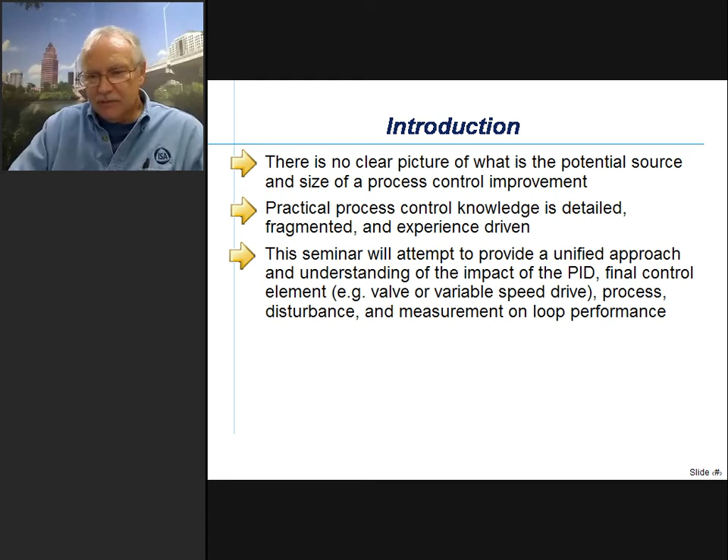So to give you some background, the way I see it, there's no clear picture of what is the potential source and size of process control improvement on a general basis. Practical process control knowledge is detailed, fragmented, and experience-driven. This seminar will attempt to provide a unified approach and understanding of the impact of the PID, the final control element, valve or variable speed drive, the process disturbance, and the measurement on loop performance. And we're going to do this in less than an hour.

Unifying concepts: it's all about management of change, whether intentional change in terms of setpoints that occur during startup or batch operation, during transitions, during optimization, or unintentional change as a result of disturbances coming in from other parts of the process. It could be ambient condition related, raw material related, due to valves acting badly, or control loops tuned too aggressively, or due to some interactions in general.

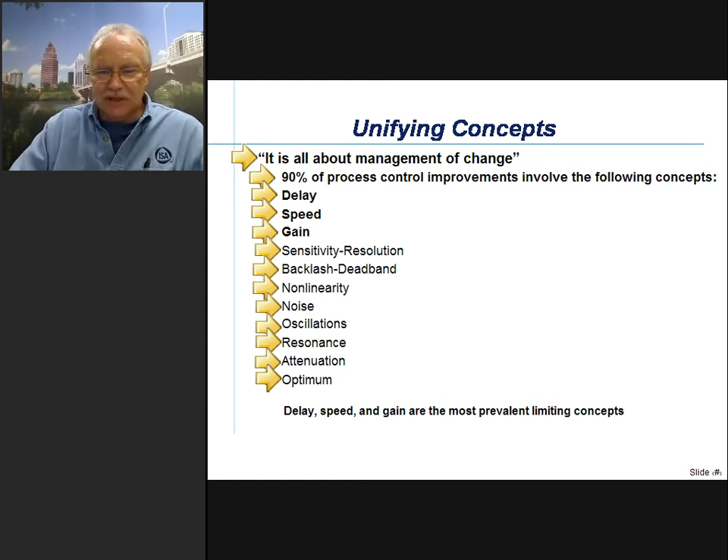90% of process control improvements involve the following concepts. Delay, speed, and gain are the big three, and we're going to spend most of the time today on those. Then hopefully we get into things that are becoming less of an issue, although some plants still have sensitivity, resolution, backlash, and deadband problems, principally with their final control elements, valves and variable speed drives. And there's the nonlinearity that's always there. We have noise, and we have oscillations, principally as a result of control loops and bad valves, and we can have resonance as a result of those oscillations. We like to have control systems and volumes designed to attenuate those oscillations. And lastly, there's of course the opportunity for optimization, and to realize a lot of the benefits from making these improvements, you often have to change your set point. So delay, speed, and gain are the most prevalent limiting concepts — we'll spend the most time on those.

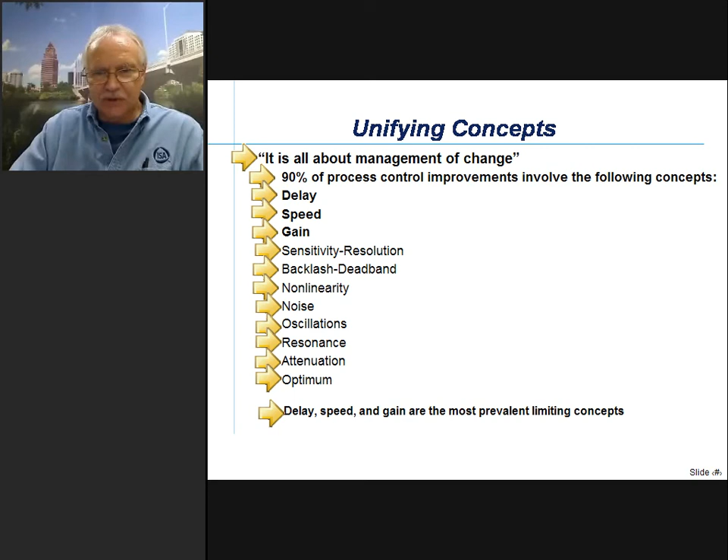Delay: without dead time, I'd be out of a job. I said that a long time ago, and since I still have a job, we still have dead time in all our loops. The only place where you don't have dead time, or negligible dead time, might be in aerospace or servo mechanism control, or sometimes in loops created in a university, theoretically anyway, ending up with just a single time constant and no dead time — you can do principally anything you want with those loops. But in real life we have dead time, and a more descriptive name would be total loop dead time. The loop dead time is the amount of time for the start of a change to completely circle the control loop and end up at the point of origin.

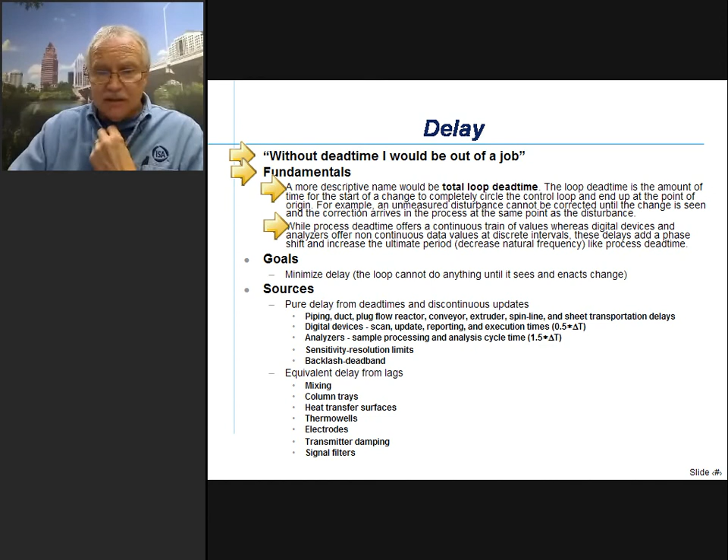An unmeasured disturbance cannot be corrected until the change is seen by the controller, and the correction arrives in the process at the same point of entry as the disturbance. Process dead time offers a continuous train of values, whereas digital devices and analyzers offer non-continuous data at discrete intervals. All of these delays add a phase lag, increase the ultimate period, and decrease the natural frequency, like the process dead time.

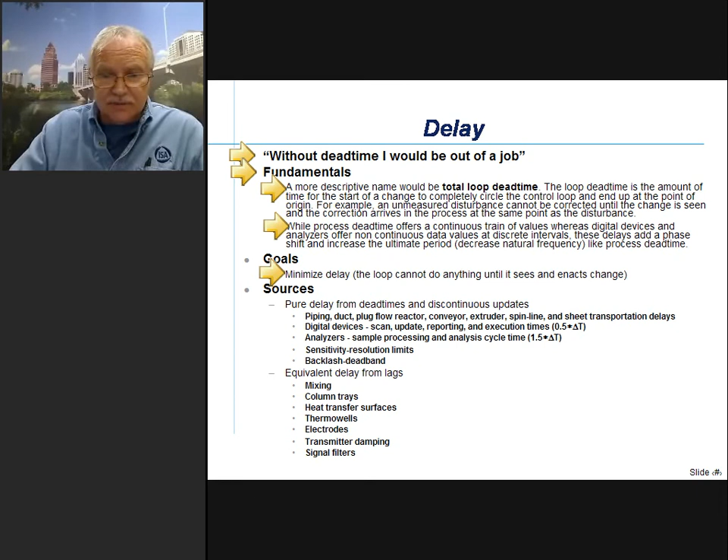Our goal is to minimize delay, wherever it is. The loop cannot do anything until it sees and enacts a change. We have pure delay from dead times and discontinuous updates.

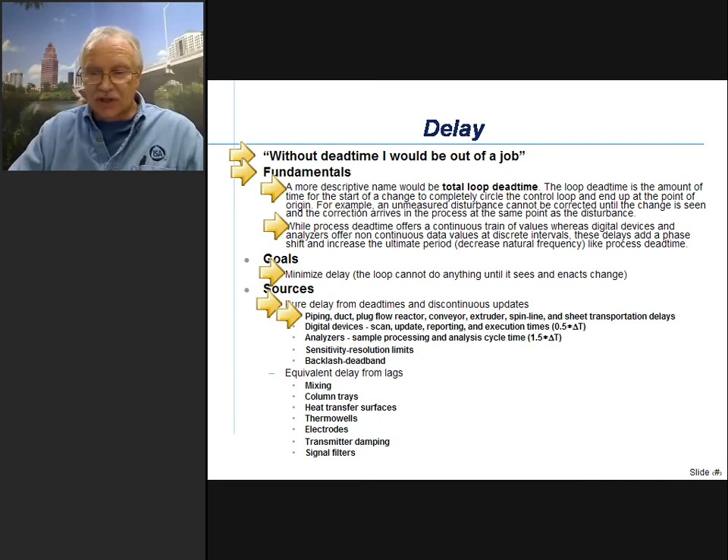In the process, piping, ducts, plug flow reactors, conveyors, extruders, spin lines, and sheets can all have transportation delays, where a change at point A takes time to be transported to point B, perhaps where it is measured. This transportation delay, for a lot of this type of equipment like piping, ducts, and plug flow reactors, could simply be the volume between point A and point B divided by the flow rate.

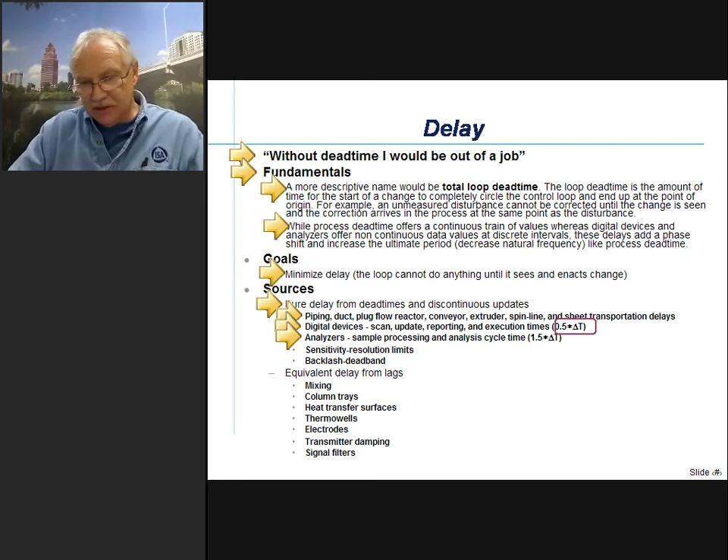We also have digital devices today, and hopefully the scan, update, reporting, and execution time is small compared to the process dead time. On average, the amount of delay from these scan, update, reporting, and execution times can be considered about half of that time interval. Then we have analyzers, which can be a source of much larger dead time when there's sample processing and analysis cycle times. Since the result is made available at the end of the cycle time, whereas with digital devices it's usually near the beginning, we actually get more effective delay. You really need to take 1.5 times the total sample processing and analysis cycle time as the amount of delay you'd get in the control loop.

Then we have sensitivity and resolution limits. People often don't realize these create dead times, because a lot of discussion in the literature uses step changes for testing. If you make a step change large enough, you won't see the dead time from sensitivity and resolution limits, or from backlash and deadband. But controller outputs usually are ramping rather than stepping, and the ramp through these limits takes time. You can estimate the dead time as the value of the sensitivity and resolution, or backlash and deadband, divided by the rate of change of the controller output. So the faster you tune your controller, the less you'll see in terms of delay from sensitivity and resolution, backlash and deadband.

Then we have the equivalent of delay from small time constants, small lags in series. In the process, this is due to mixing—we don't have perfect mixing, so we get lags associated with that. The big source of large lags is, of course, a distillation column or any type of column with many trays, where each tray is like a relatively well-mixed volume due to turbulence and bubbles. All these volumes in series create lags, and as a result, these lags in series create dead time or delay in the process.

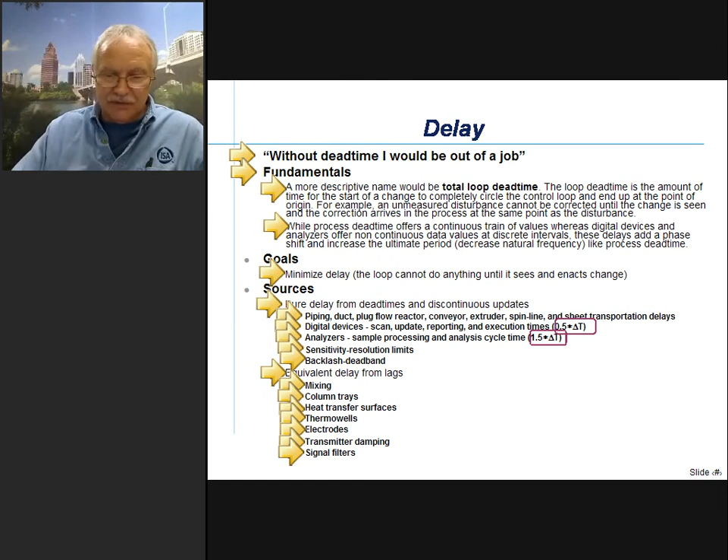And we do have an equation later on to show how you can figure out what the real process is doing if somebody put in a big signal filter. Or you can use the same equation to see the effect of volumes that act like a filter of oscillations.

Anyway, the other parameter that is very important is speed. I first started to think of time constant, time lag, but then you got integrating processes, and all different sizes of time constants, and really what we're looking at is the rate of change of the process, principally in the first 4 dead time intervals, in the beginning, when the controller has to do most of what it can do. The thing is that speed kills. High-speed processes and disturbances, or low-speed control systems, can kill performance. So the fundamental here is the rate of change in 4 dead time intervals is most important.

And we'll see this for the 3 major types of processes. By the end of 4 dead times, the control loop should have completed most of its correction. Thus, the shortcut tuning method in Deminar 6 is consistent with performance objectives and this fact that the rate of change initially, right after you start to see the response, is what's most critical.

Our goals are to make the control system faster and make the processes and disturbances slower. I remember taking a graduate course in distillation column control and I was told by the professor, this process is really bad because it is so slow. And I'm thinking, wow, slow process, I can tune my controller to take advantage of the large process time constant. It turns out for distillation columns, a large process time constant is about 5 times larger than the dead time. And if you tune the controller to be aggressive, it means you can catch up to these disturbances a lot better, since the column is responding slowly.

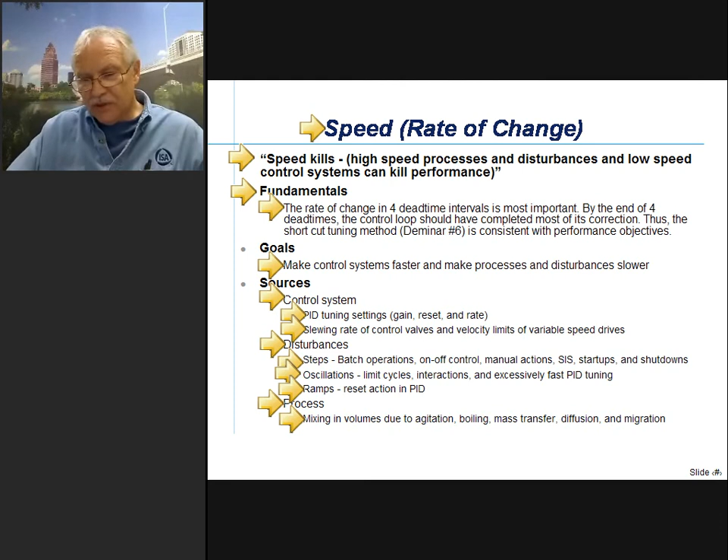The mixing is provided by agitation, boiling, mass transfer, diffusion, and migration. So even if it's not an agitated tank, if you have a large enough tank and a big enough residence time, just due to diffusion and migration and the tendency of chemicals to go from areas of high concentration to low concentration, we'll end up with mixing and blending, unless there is some layering going on due to density changes between components in the tank.

The third concept is gain. It's everywhere in the loop. All is lost if nothing is gained. If you had a zero gain, you wouldn't be able to see what's going on. So a zero gain anywhere in the loop would be, of course, disastrous.

We don't see that, but we do end up sometimes with control valves being on the very flat part of their installed characteristics, and we say they're losing their sensitivity. Really what they're doing is ending up with almost a zero gain for that final control element when it's way out on the flat part of the installed characteristic. This occurred quite a bit when we were trying to push plants way beyond the normal operating set points they were designed for, and we end up with valves on the flat part of their installed characteristics, say rotary valves up around 80 to 90% open.

Fundamentals. Gain is the change in output for a change in input to any part of the control system. Thus, there is a gain for a PID controller. We're probably familiar with that, but also with the valve, disturbance, process, and measurement.

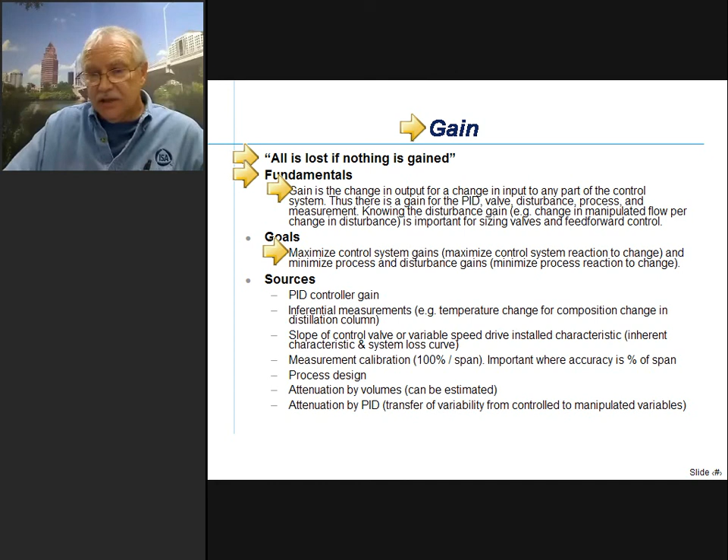Knowing the disturbance gain, the change in manipulated flow per change in disturbance, is important for sizing valves, for feed-forward control, and for control system analysis. Our goals are to maximize the control system gains, maximize the control system reaction to change, and to minimize the process and disturbance gains, minimizing the process reaction to change.

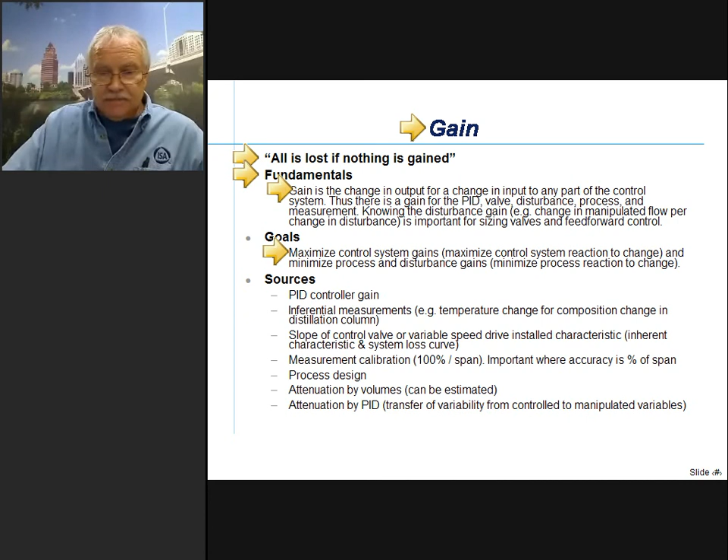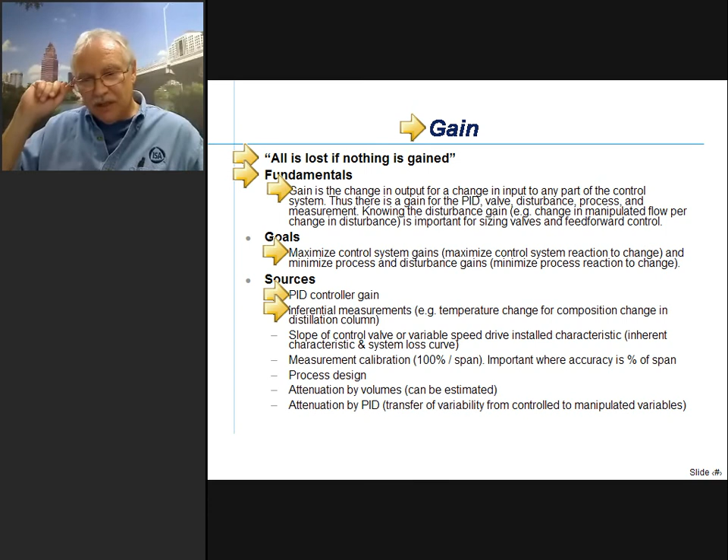The sources: PID controller gain, inferential measurements, the temperature change for a composition change in a distillation column. This is one case where the gain needs to be increased because it's an inferential measurement, and if you don't have much of a temperature change for a composition change, then you're not going to be able to use temperature in the control loop as a way of controlling the composition of the column.

So it is a case where, in inferential measurements, you've got to make sure that whatever you're using as an indication of what you're really after, which is often a composition, has enough of a change for the composition change to be indicative of what's going on.

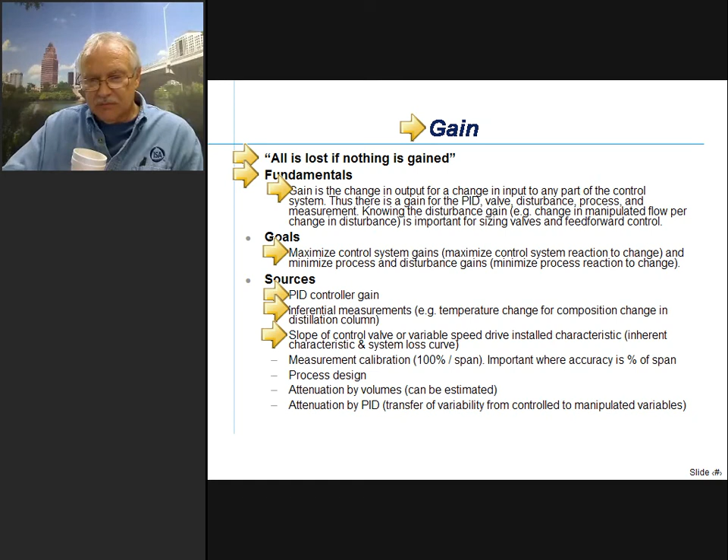The slope of the control valve or the variable speed drive installed characteristic, that's going to be the gain, and it depends upon the inherent characteristic and the system loss curve. You have to be particularly careful with variable speed drives with high static heads. You may run out of process gain there at the low speeds much sooner than you might think.

Measurement calibration: the gain there is 100% divided by the span. It's important where accuracy is in percent of span. With smart instruments, it's not so much the case, but in general, if you want to have a lower measurement error, you try and narrow the span to just cover your operating range of interest.

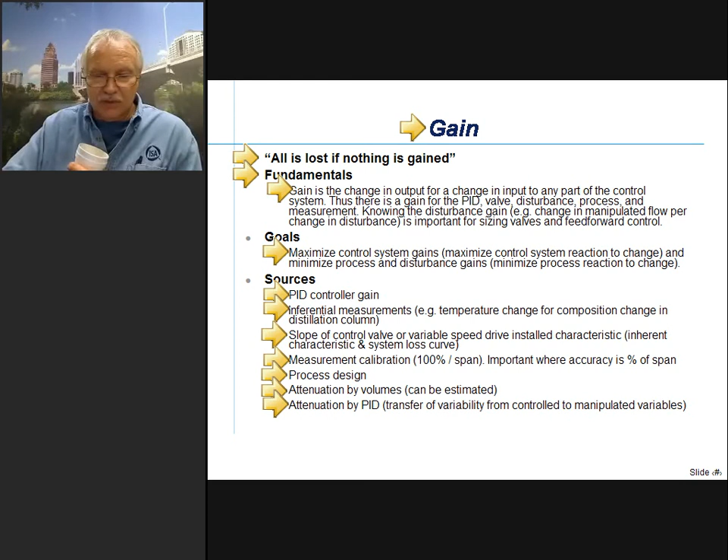And of course, process design is going to affect the process gain, and that's beyond the scope today. Attenuation by volumes, which we're going to see how to estimate, is going to actually reduce the gain of whatever is downstream that you're interested in. The attenuation by PID and the transfer of variability from controlled to manipulated variables is going to, again, attenuate and change the gain associated with what may be happening downstream that you're ultimately interested in.

Now, hopefully today, sensitivity and resolution is not so much an issue. With the new DCS systems, we have much greater A to D resolution, and with new smart measurements, we have better sensitivity, and with digital positioners and the newer throttling valves with diaphragm actuators, we have good sensitivity.

However, a resolution limit is different, and a resolution limit will quantize the change. It's very common in the literature for people to say resolution when really they should be saying sensitivity. It's nice to know the distinction, because actually a resolution limit would be more severe, because you're going to get a step response, and you're not going to get those intermediate values once you get past the resolution limit like you get once you get past the sensitivity limit.

Both will cause a limit cycle if there's an integrator anywhere in the process or the control system, a single integrator.

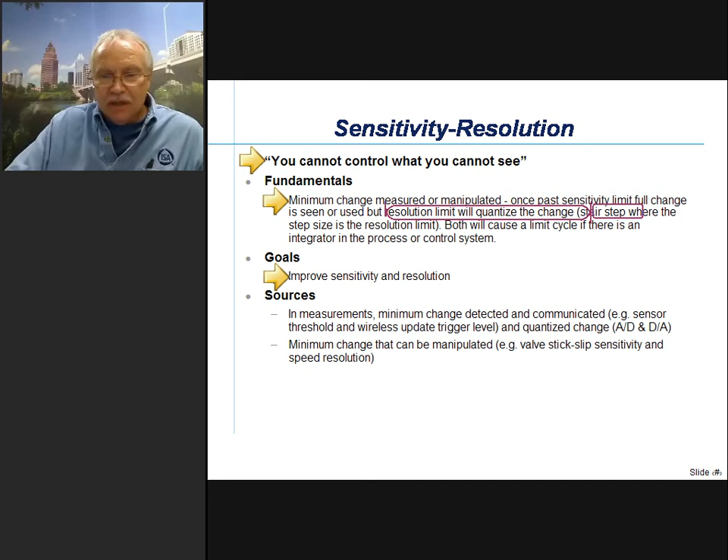The goals: improve sensitivity and resolution in measurements, meaning the minimum change detected and communicated. For example, the sensor threshold for its ability to do its job, and the wireless update trigger level, and the quantized change you get from A to D and D to A converters.

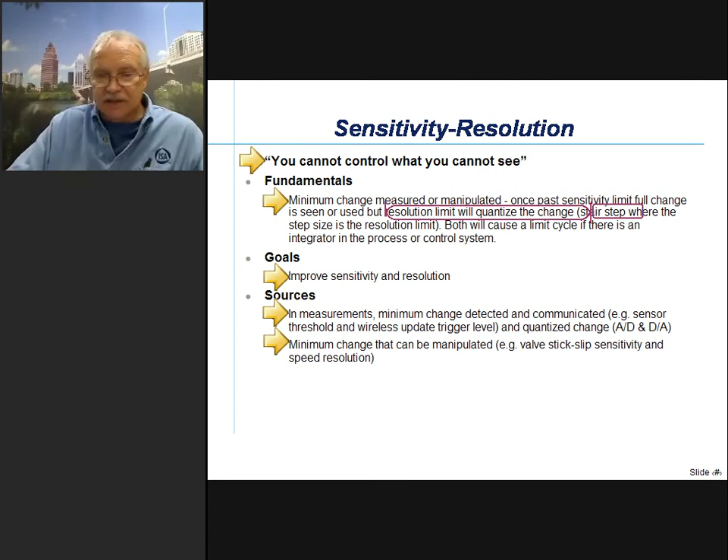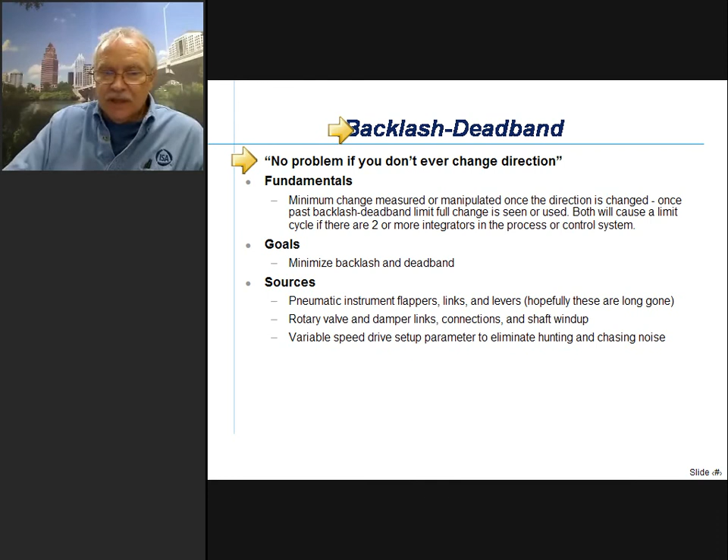For final control elements, it's the minimum change that can be manipulated. For example, control valve stick-slip sensitivity and speed resolution, backlash and deadband. It's no problem if you never change direction, but the minimum change measured and manipulated matters once direction is changed. Once past the backlash deadband limit, the full change is seen or used.

Both will cause a limit cycle if there are two or more integrators in the process or control system. It's not commonly known, but a cascade control system on a self-regulating process will have a limit cycle from backlash deadband if both the primary and secondary loops have integral action. So we should minimize backlash and deadband.

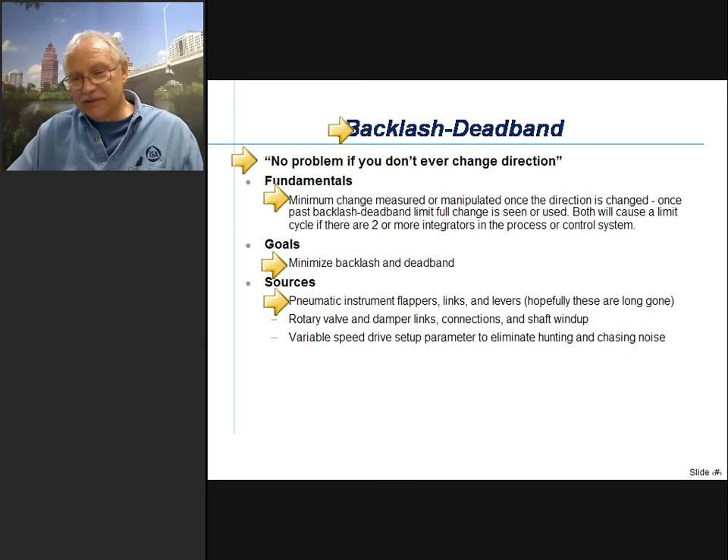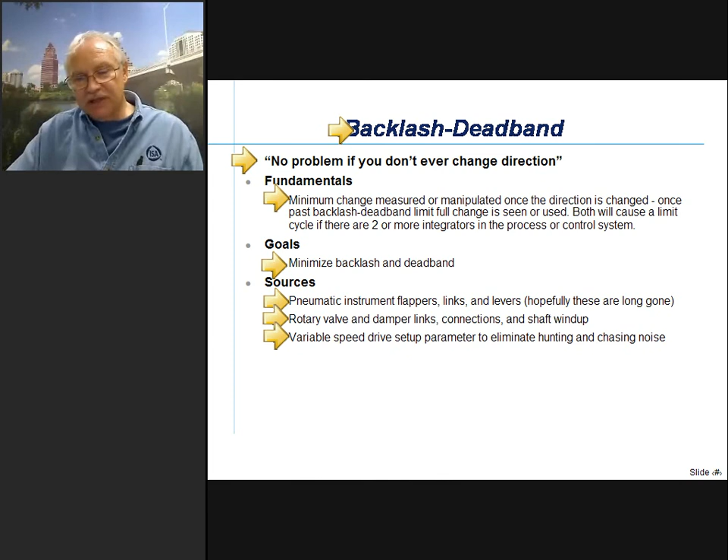Sources: hopefully we don't have any more pneumatic instruments laying around, installed. They may be laying around, hopefully not installed in your process, because the flappers, links, and levers have backlash and deadband. Rotary valves and dampers are notorious for backlash and deadband due to their links, connections, and shaft windup. Variable speed drive setup parameters often put in a deadband to eliminate hunting and chasing noise.

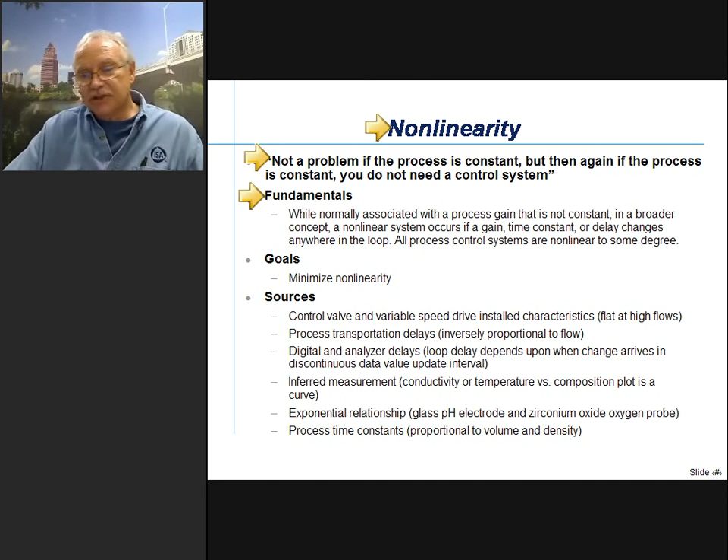Nonlinearity is not a problem if the process is constant, but then again, if the process is constant, you don't really need much of a control system. Fundamentally, while normally associated with a process gain that is not constant, in a broader sense, a nonlinear system occurs if a gain, time constant, or delay changes anywhere in the loop. All process control systems are nonlinear to some degree. Our goal is to minimize nonlinearity.

Sources are the control valve and variable speed drive installed characteristic, particularly with valves that have a flat characteristic at high flows. For variable speed drives, it could be at high static heads and low speeds.

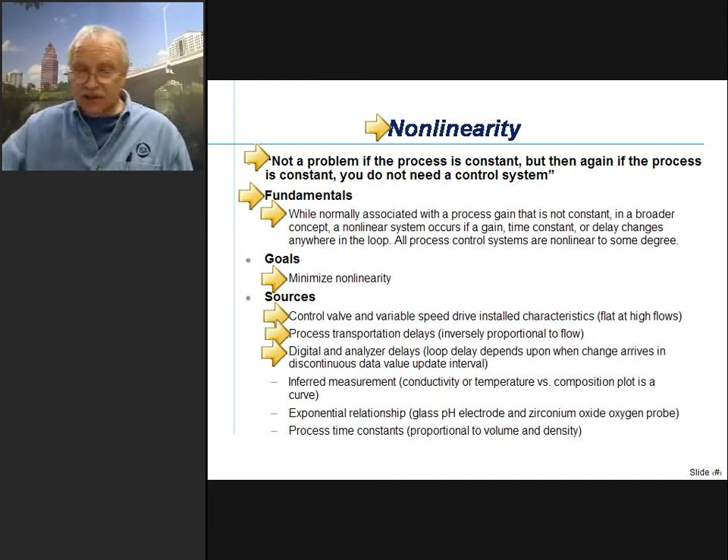Process transportation delays are inversely proportional to flow. Digital and analyzer delays, where the loop delay depends upon when the change arrived in a discontinuous data value update interval. But we have ways of approximating it on average, as I mentioned, as either half or 1.5 times the time interval, depending whether you're talking about a digital system or an analyzer.

Inferred measurements: a conductivity or temperature versus composition plot is a curve, but not a straight line. Exponential relationships, for example, the glass pH electrode and zirconium oxide oxygen probe. And process time constants that are proportional to volume and density.

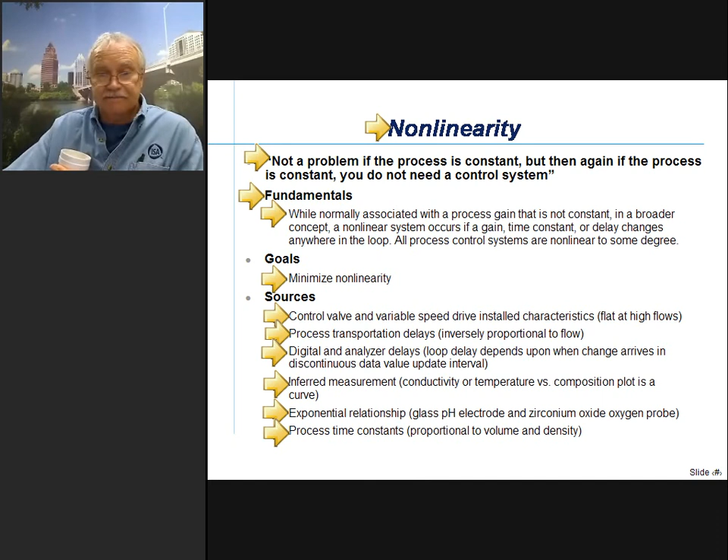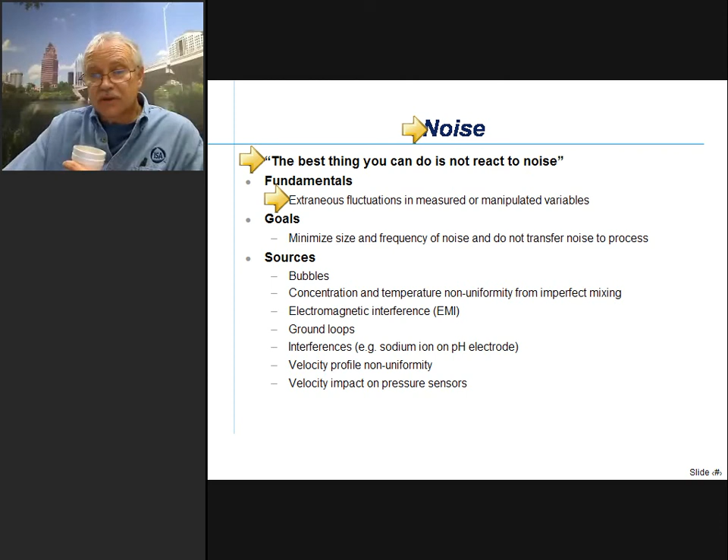Noise: the best thing you can do is not react to noise. Fundamentally, extraneous fluctuations in measurements or manipulated variables can be the source of noise. We want to minimize the size and frequency of the noise and not transfer noise to the process.

I think what I meant to say here in terms of frequency of the noise, well, it kind of depends where you are in terms of the control loop, which we'll see.

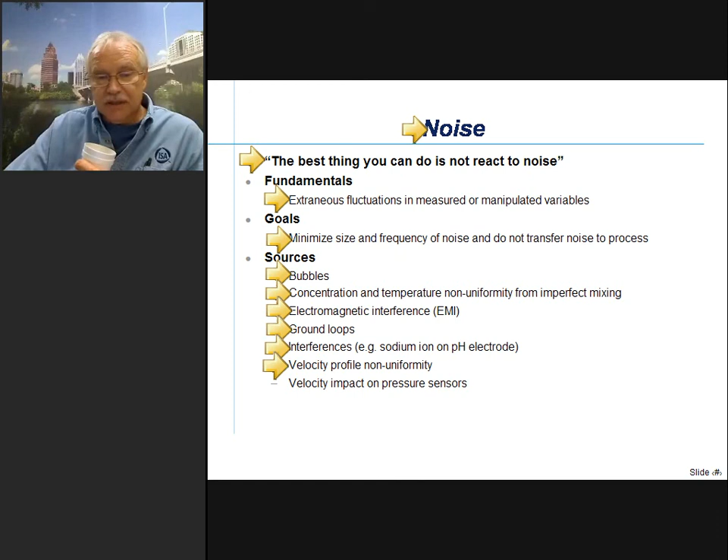Sources are bubbles, concentration and temperature non-uniformity from imperfect mixing, electromagnetic interference, ground loops, a common problem with pH, interferences such as with sodium ions and pH electrodes, velocity profile non-uniformity for a lot of flow measurements, and the velocity impact on pressure sensors.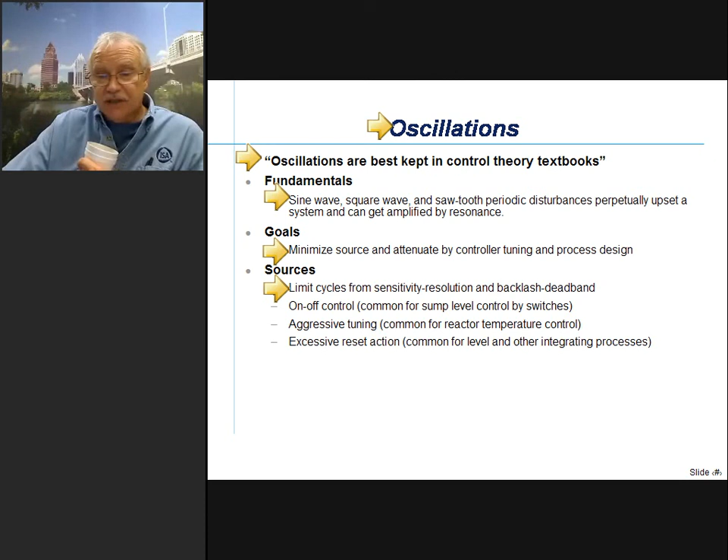Limit cycles from sensitivity, resolution, backlash, deadband, on-off control, aggressive tuning, and part of this is interactions, and then excessive reset actions that we get, particularly common for level loops.

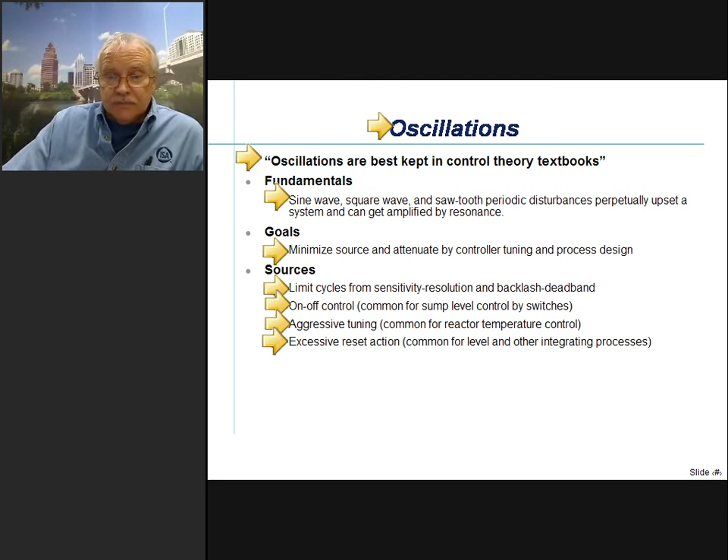Resonance: don't make things worse than they already are. The oscillation period, if it's close to the ultimate period, can be amplified by feedback control. Make the oscillation period slower, or make the control loop faster.

Control loops in series with similar dead times, like multiple stage pH control, are a situation that could end up in resonance.

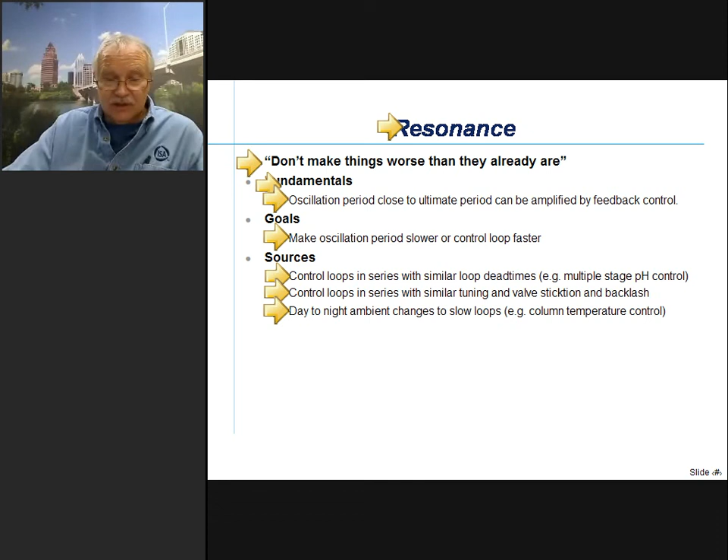And control loops in series with similar tuning and valve stiction and backlash, and a much slower oscillation, say from day to night ambient temperatures. But these can be a problem for slow loops, like on very big columns that may take a day or two to line out after a disturbance. Here, the day to night changes can end up causing continuous oscillation.

Attenuation. If you had a blend tank big enough, you would not need control. We ran into that in some spin lines.

We spent a couple of days there, but almost immediately we found out the polymer pumps were maxed out from all the different polymer lines. And I said, well, you have no control. I found out they had these huge blend tanks, and they were able to blend out the differences.

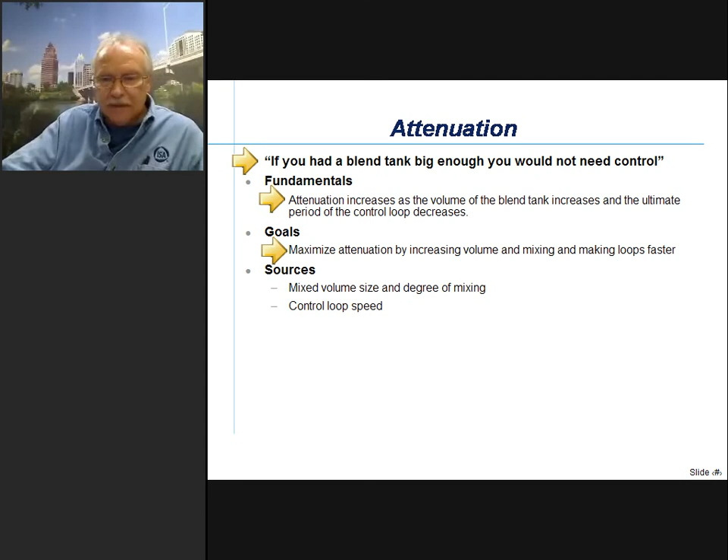After 10 minutes, they decided there was no opportunity, but we had to stay for 2 days to follow through. Anyway, attenuation increases as the volume of the blend tank increases and the ultimate period of the control loop decreases. We have an equation for that. We can maximize attenuation by increasing volume and mixing and making loops faster. So the sources of attenuation are the mixed volume size and degree of mixing, and also control loop speed.

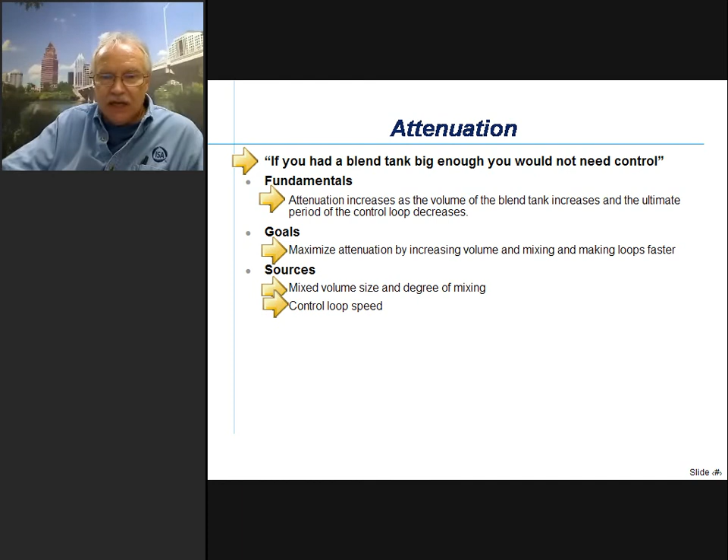Optimum. This is a whole subject in itself. Most set points are not at their optimum. The fundamental issue is the primary loop set point is offset from the optimum temperature, pressure, or concentration. We should minimize this offset.

The sources of non-optimum operation: the most common one cited is process variability, but we have other things like measurement error, sensitivity, resolution, backlash, deadband, and limit cycles. Lack of process knowledge is a big one.

Process nonlinearity means you can't feel comfortable with an adjustment being valid on a continuing basis. Operator preference - they have sweet spots, so that goes along with lack of process knowledge and process training. And then there are some incorrect safety instrumented system settings that cause you to back off from the optimum when you really don't need to.

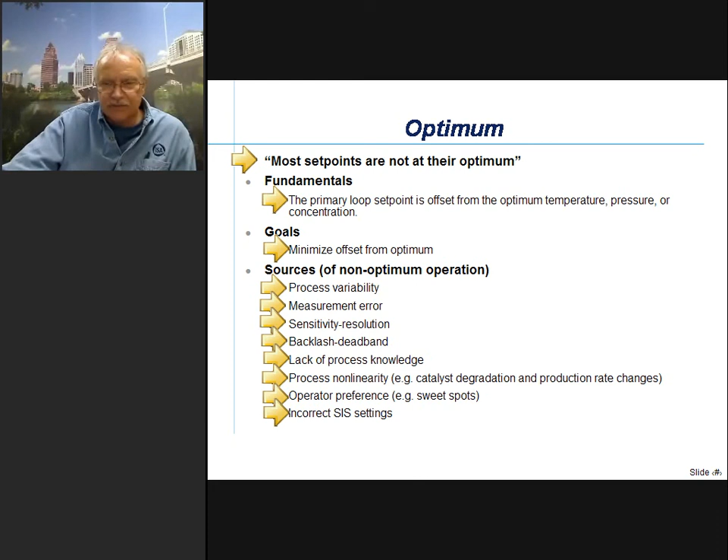So we have different types of processes. The three principal types are self-regulating, and here again I'd say it's the maximum speed in the first 4 dead time intervals, which is true for the more interesting loops. You could say for a flow loop everything happens so quickly that this isn't really applicable, but I'm more interested in the tuning of temperature loops, vessel pressure loops, concentration loops, and pH control loops. For those, we get much slower responses and larger process time constants.

So again, we do have a delay, and we do have a process time constant. In this case, it's a negative feedback time constant, and that determines the speed. We also have a process gain, and if you're going to use it for tuning the controller, you have to make sure everything is in percent per percent.

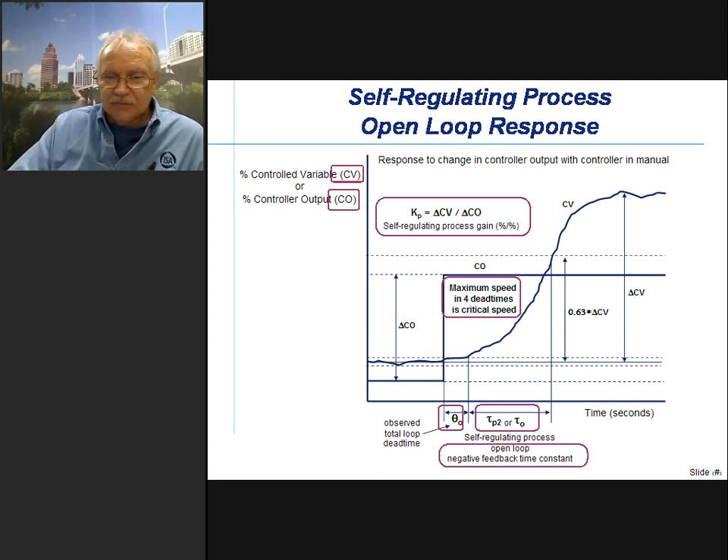So instead of PV, which is in engineering units, I like to use CV for controlled variable, with units in percent. Similarly, instead of controller output, which can be in engineering units, I like to use CO, to indicate I'm talking about percent controller output.

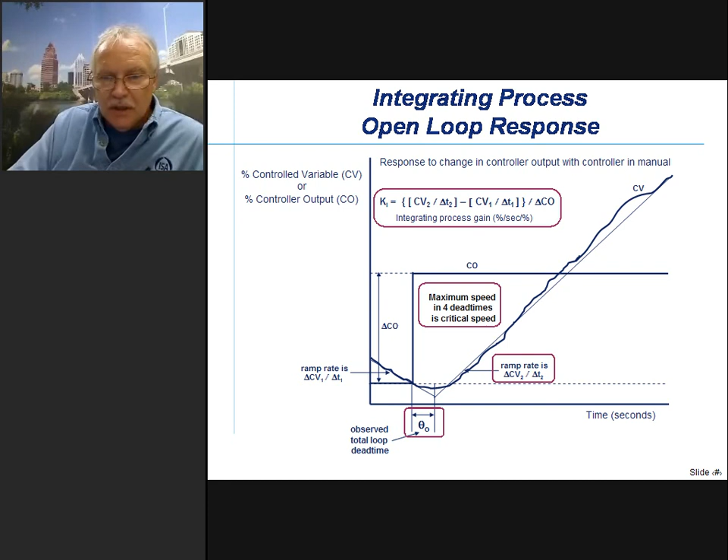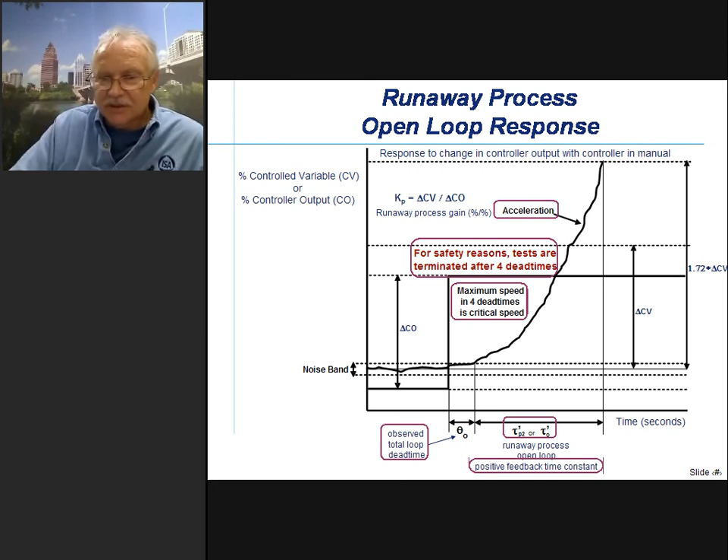Probably a safer way of doing this test is to do it in closed loop and make a set point change. These loops typically have high controller gains, so you're mostly going to see a step change in controller output from the high controller gain, and then a response in this ramp rate. You take the maximum speed there, and you can then kind of tune it with the shortcut method tuning settings, but you have to make some adjustments, as we'll see, for the reset time.

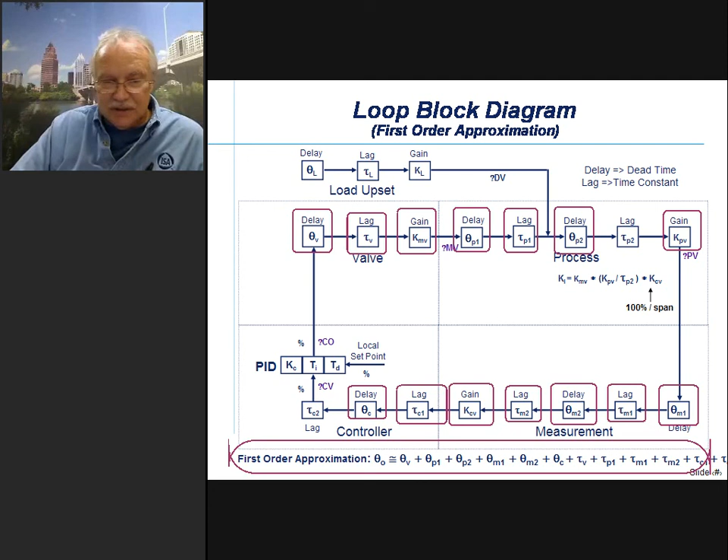But then we have lags here and delays here, and lags here, another delay here, and lags and delays. So if we sum up all of these, we end up with our first order approximation for the total dead time in the loop. Now, this is a nomenclature we're using.

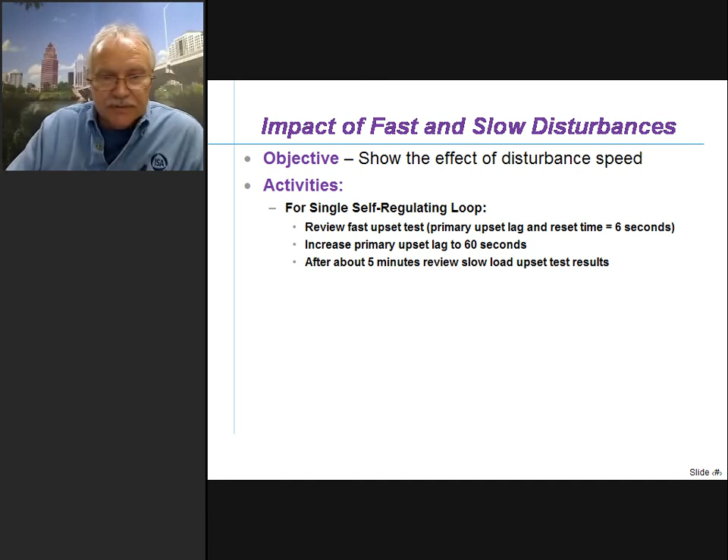So let's go and see the impact of fast and slow disturbance, and we're going to do that for a self-regulating loop. First, we're going to review the fast upset test, where primary upset lag and reset time are both set at 6 seconds. Then we're going to increase the primary upset lag to 60 seconds and see what happens.

We're going to do this in the single loop lab available on the process control website. We only have 2 virtual plants available because we're in the midst of making improvements, and it turns out with the remote desktop entry we have, IT departments typically only allow the ports we've got assigned for virtual plants 1 and 2.

We actually have 16 virtual plants, and we're working on a way of making these accessible without having to go through the ports blocked by IT. We're looking forward to making all the virtual plants available for free use by people.

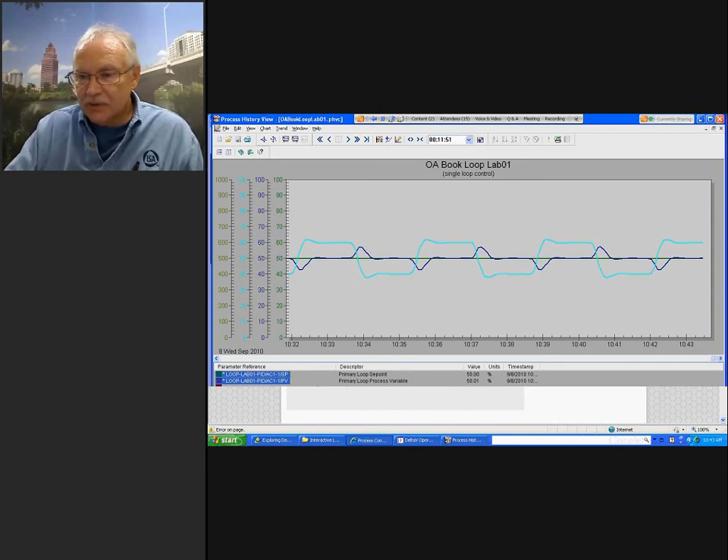Well, let's look at what we have in terms of an oscillation. I set up a test and simply do that. All I had to do here was go to the test mode. Normally we're in explore mode when we're looking at things, but here in test mode we have this square wave. However, the square wave disturbance has a time constant associated with it, and right now it is 6 seconds. So we're going to change that to 60 seconds.

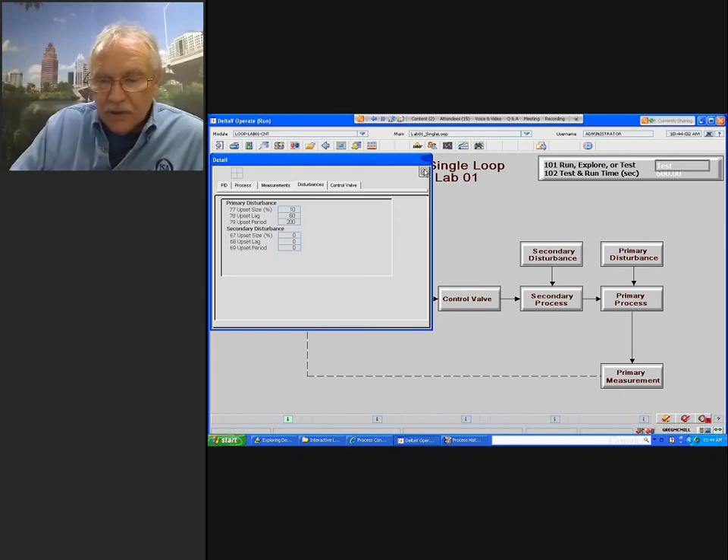And we're going to let that develop over a period of time, and while that's happening, we'll go back to the seminar.

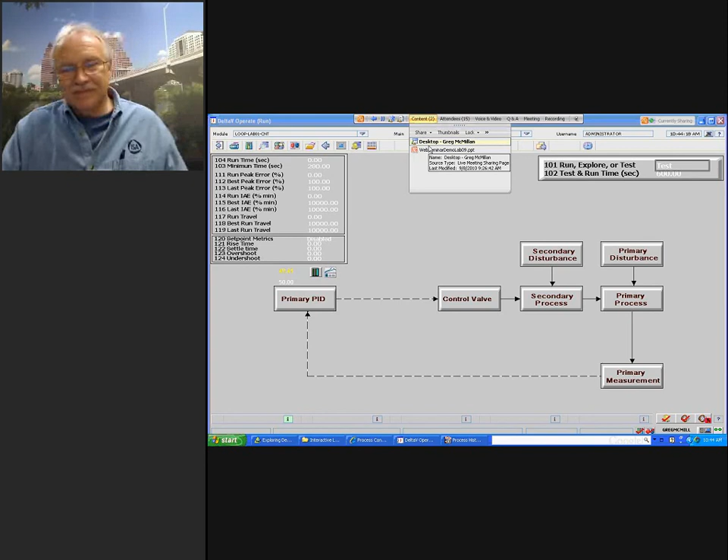Now, what people probably don't realize is that there is a practical limit to controller performance. I personally concentrate on minimizing dead time, but it turns out that if you don't concentrate on tuning the controllers as fast as necessary to meet your objective, you're going to end up not doing as well as you think.

Based on the amount of dead time that you designed into the system, that may have cost you a lot of money, or maybe not a lot, but some money in terms of doing a better process design. And you're not going to see the benefit of that if you don't take advantage of it by tuning the controllers faster, or at least as fast as necessary to meet your objective.

This first equation here I got from Peter Harriott, and it's really for a proportional-only controller. But most of what you see as peak error really doesn't depend upon reset action, because reset is ramping over a period of time. Most of what you get in terms of reducing the peak error is more immediate, and that's from proportional action. So all of these equations are a rough estimate.

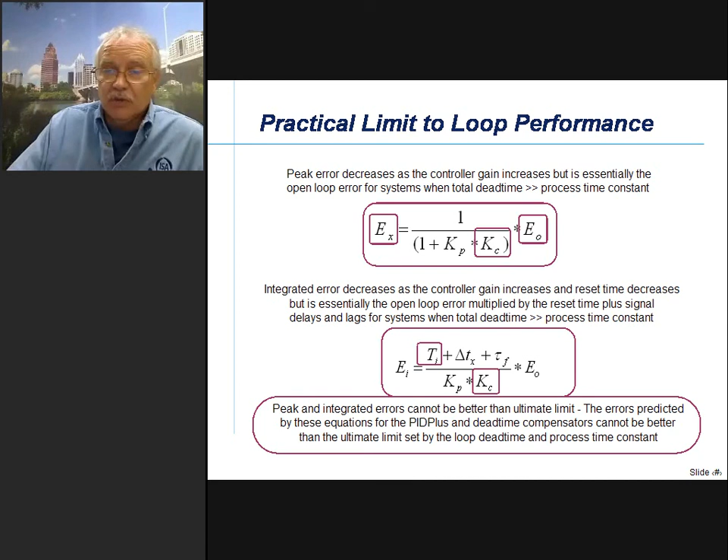Peak and integrated errors cannot be better than the ultimate limit. The errors predicted by these equations for the PID plus, which we looked at in Deminar number 1, and for dead-time compensators that we're going to look at in the next Deminar, number 10, cannot be better than the ultimate limit set by the loop dead time and process time constant, which is what we have here on our next slide.

Here the peak error is proportional to the ratio of the loop dead time to the 63% response time, which in the first order approximation is that loop dead time plus the primary process time constant. You can see here for dead-time dominant systems, it tends to work towards the peak error being equal to the open loop error for a step disturbance, but it doesn't really nail it.

The integrated error is proportional to the loop dead time squared, and in the denominator again we have the 63% response time. So you can see how dead time is really very detrimental to the integrated error.

This approximation can be seen as a result of placing the optimum response, which is two right triangles next to each other, where the base is the dead time and the altitude is the peak error. That's how you can get at the equation this way. There are a number of other ways in Advanced Control Unleashed and in my current ISA paper at ISA Automation Week, first week of October, that go into the derivation of this.

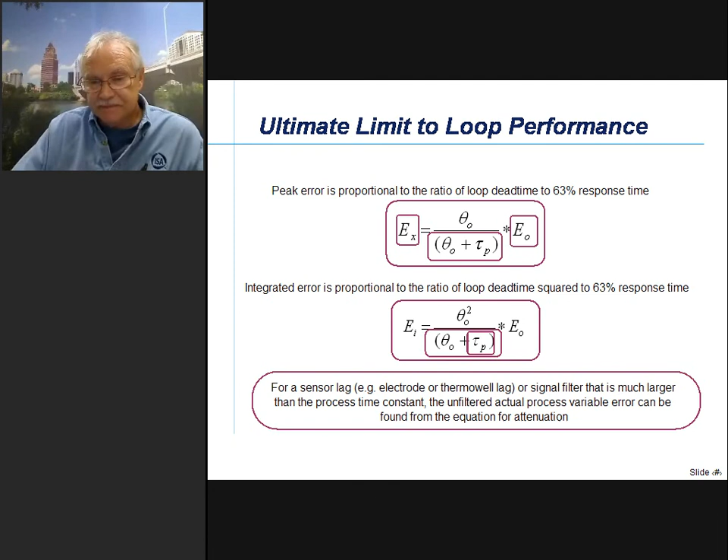Now, what about the effective disturbance speed? It's kind of hard to estimate, but here we can get a rough approximation by saying instead of the open loop error we have from a step disturbance, we now have an exponential response. That exponential response is basically how far it goes in terms of seeing that open loop error within the process dead time.

Because again, the control system cannot do anything to correct for a disturbance in that dead time. It can't see what's going on. It can't enact a corrective measure at the right point in the process in that time. So during that time, the disturbance is traveling, and you can estimate how far it's gone in that dead time interval as a way of getting at what is the actual load disturbance error you're going to be working with. You would substitute that in the equations for E sub O to get the effect.

Then if you want to look at the attenuation by volumes, you can use this equation, and this assumes that the time constant here is much larger than the oscillation period.

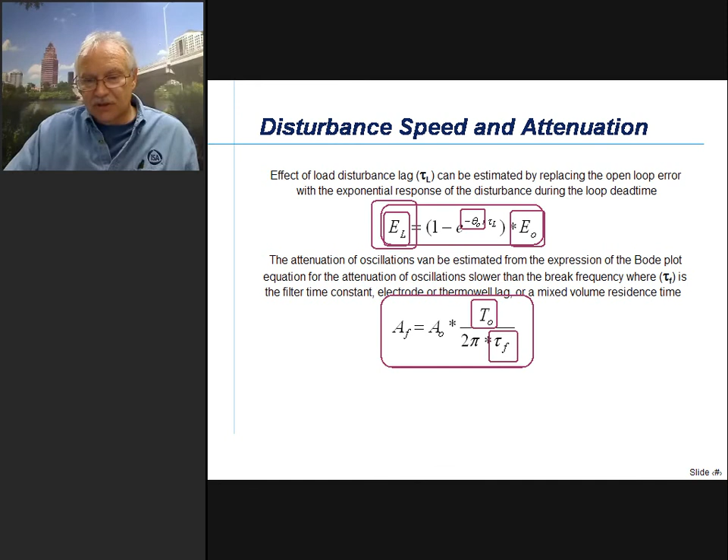I mentioned you can use this to get back at the original oscillations if you happen to have had, and this is normally undesirable, a very large signal filter. So what you're seeing in your trend charts is a filtered amplitude, and you want to get back to the original amplitude here.

So it's a convenient equation not only for signal filters, but for looking at the effect of electrode or thermowell lags. An electrode that suddenly has a 200-second time constant, at least on a static mixer, is going to look like it's drawing almost a straight line in pH if there's any sort of buffering in the system. You may think things are going really well, until you notice that the period is really very large.

And if you use this equation, you can get back to the original amplitude before the filtering. The large electrode time constant is really bad. And one war story is...

They had an extruder, and they relocated the temperature sensor from the melt into a wall with a massive block of metal, and the amplitude of the temperature oscillation was a lot less. So the edict went out: install all the temperature sensors in our extruders in the massive block of metal rather than the melt, because the trend chart looked so much better.

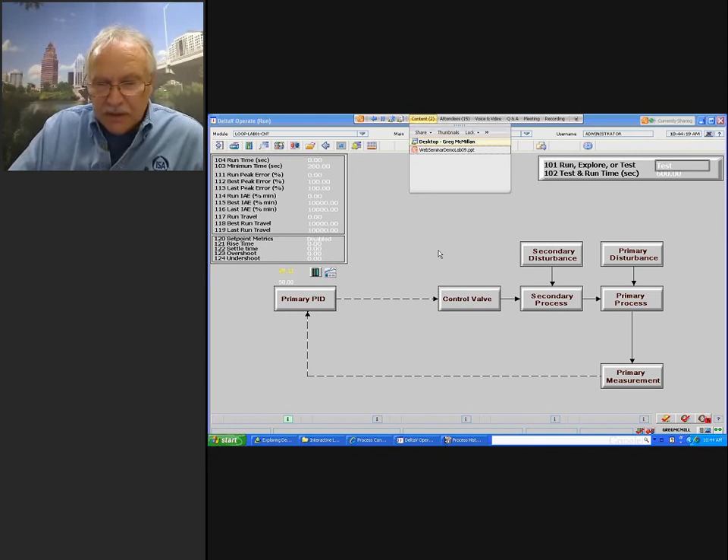Well, what we're most interested in here is the dark blue. And you can see things are looking a lot better now that we have this relatively big disturbance. We could even have a slower disturbance than this in terms of speed. So this is where we were with a 6-second time constant on the disturbance, and this is where we are with a 60-second time constant disturbance.

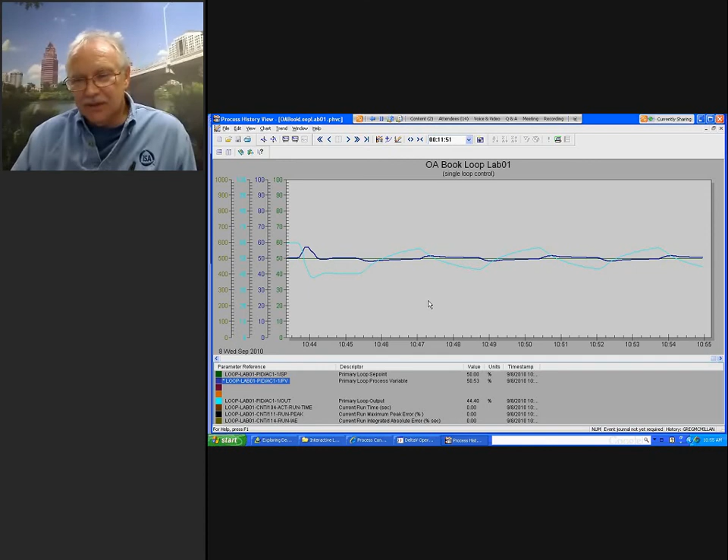And this is some of the clue why on bioreactors they can't see the control problem you're talking about with pH and temperature. It's really hard for them to relate to, you know, even whether they need to improve controller tuning. Well, their disturbances don't have a time constant of 60 seconds. They may have disturbances that are days. They could be a 24-hour time constant, since their batches may take 2 weeks.

So it's good to know that even though control theory textbooks all concentrate on step disturbances, in real life, hopefully, we've got this slowing down of disturbances, and so we have a speed of a disturbance principally by the introduction of good PID control.

And the other thing that's important to know is in model predictive control, there is a penalty on move, where you can decide how quickly you want to make a move, particularly for interactions. Slowing down the move that you make can smooth things out, and it's particularly appropriate when dealing with very slow processes.

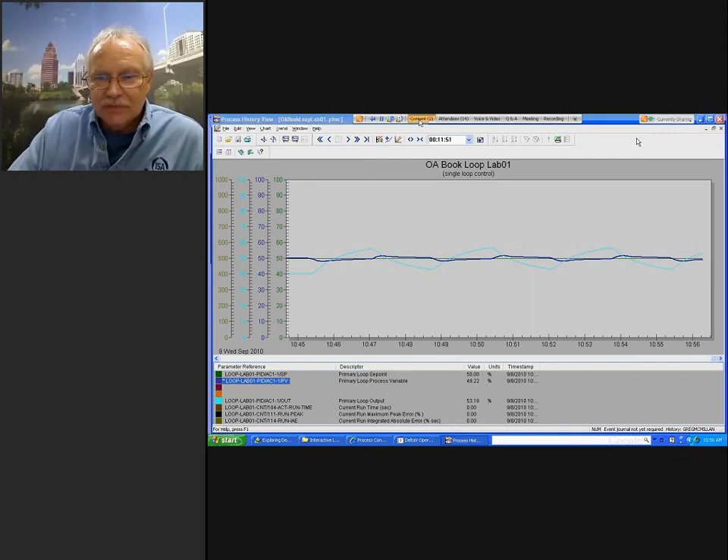So we'll go back to the seminar and wind up here, hopefully, pretty quickly.

So there's an implied dead time from slow tuning. This is something very few people realize: if you tune a controller really slow, you can screw up in terms of adding filters and delays and scan times, and you're not going to see it. So any analysis done on the effect of adding delays really has to take into account how the controller was tuned. If the controller was tuned sluggishly, in the extreme, you can almost approach manual operation. You're not going to see that.

For self-regulating processes, we can use this equation approximately, with lambda as the closed loop time constant. As we go slower, lambda gets much larger in comparison to the loop dead time, and we end up with an implied dead time that's significant.

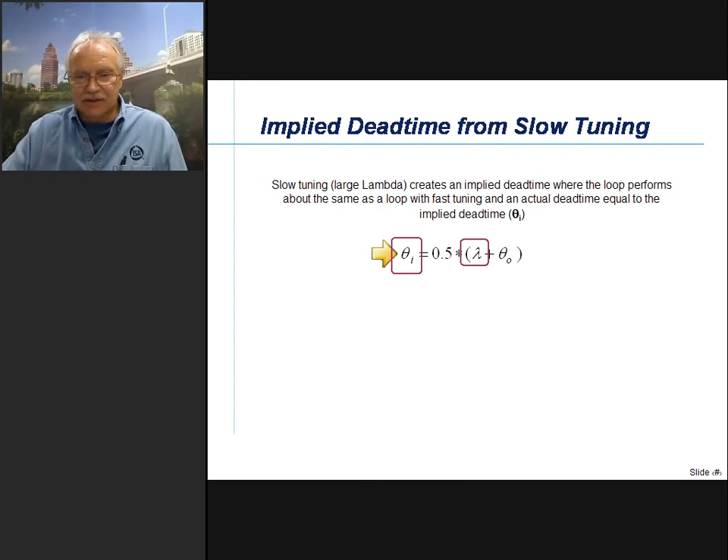And here in this test, I had a process dead time of 10 seconds, and I was asking, how much analyzer delay can I add before I start to see some degradation? Here I used a lambda of 20 seconds. So the equation would predict that I ought to start to see an effect once I had added about 5 seconds of delay to the existing 10 seconds, approaching the implied dead time in the system.

Well, here we start out with a sample time of 0 seconds. Now we increase it to 5 seconds, and notice there is really no noticeable response. Now we increase the sample time to 10 seconds—I guess this really wasn't an analyzer, this was maybe more like a digital device delay. So if we take half of that as the actual delay, say that's 5 seconds, we should start to see the change. And we do.

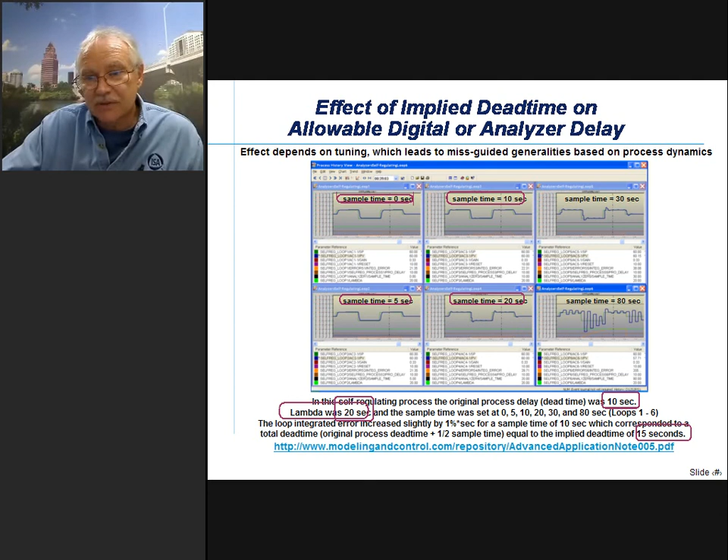I probably should have shown an effective sample time of, say, 15 seconds. It's quite noticeable at 20 seconds. The point is that if you were to tune this controller with an even larger lambda, you wouldn't see the effect at 20 seconds. You could introduce more delay and not see much degradation in control. So the effect depends upon tuning, which leads to a lot of misguided generalities that are solely based on process dynamics. If you're going to base it on process dynamics, you ought to say, this is the ultimate effect.

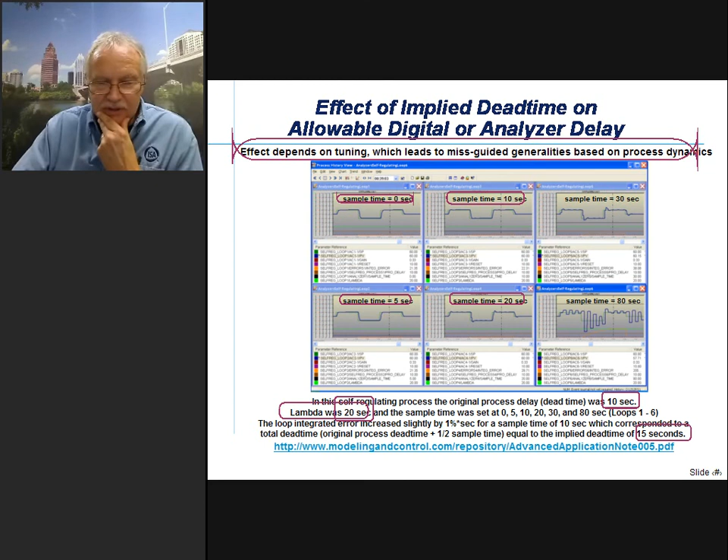But in terms of a practical effect, you need to take into account the controller tuning, because that's going to have an implied dead time in there. You may have a good reason for tuning it slow, so I can't discount the fact that the tuning may be right for the control objective. It's just slow compared to what it ultimately could be based on the process dynamics.

However, for integrating processes, at least my experience says you need to double that. And then for runaway - and very few people have a true runaway - you have to be very careful about the amount of reset time. I find that you have to have a reset time that is 10 times larger than, say, what you did for even an integrating process.